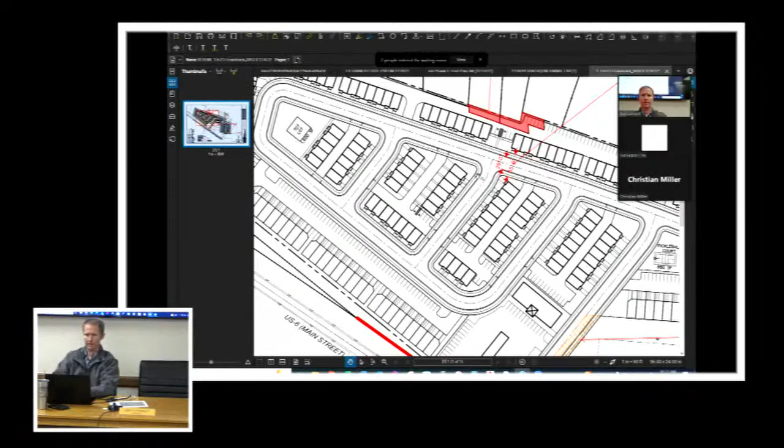The only thing I have is on the west end lot, those 5 homes right there - that's the only frontage access. A little bit in the center ones too. Those ones only have frontage off of that private drive.

Seems like we've dealt with this in other communities, and I don't know what the overall determination was, but I know for fire and EMS purposes, that style doesn't work well and makes it really restrictive for us getting in and out of those homes, as well as finding the addresses, because they tend to get lost. I think planning and zoning is going to have some comments on that as well, on that set of buildings.

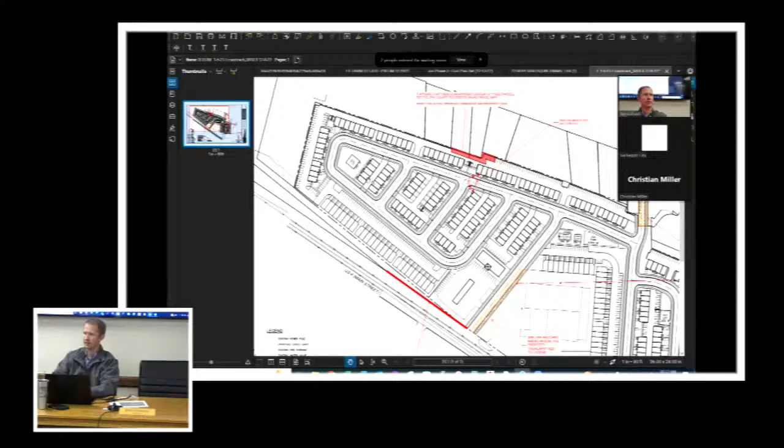We'll look at that as well. We can talk about that right now. Our suggestion is to keep with the consistency of having everything on a public street.

Maybe you could take the 2 outside units on each end and turn them so the fronts are facing the public road. I don't know what the total unit count is where another unit could be put. There might just need to be a unit that's lost there.

In the exhibit of the development agreement, you only had 4 units in that specific location. So having those units turn and face the public street, and then having like a little hammerhead for access to those garages, that might be something that needs to happen to stick with the requirement that everything be on a public street.

So I think that would probably satisfy the concern you had there. You might be able to turn 3 units to face the north and 2 to the south, something like that, with a small driveway in between them so that they're rear loaded.

Okay, yeah, we can look at that. It just depends on what space you have, and if that eats up any of the open space, because I know you're probably close to the open space agreed upon for this development. So I think most everything else in terms of layout probably works, but that was the one area we identified that probably needs to be adjusted a little bit.

Okay, John, you've got 2 people in the waiting room. Yeah, one there for Sean Young's for a separate project. So Jacob's with us? Jacob's with you guys. Yeah, gotcha. If you would, please. Yep.

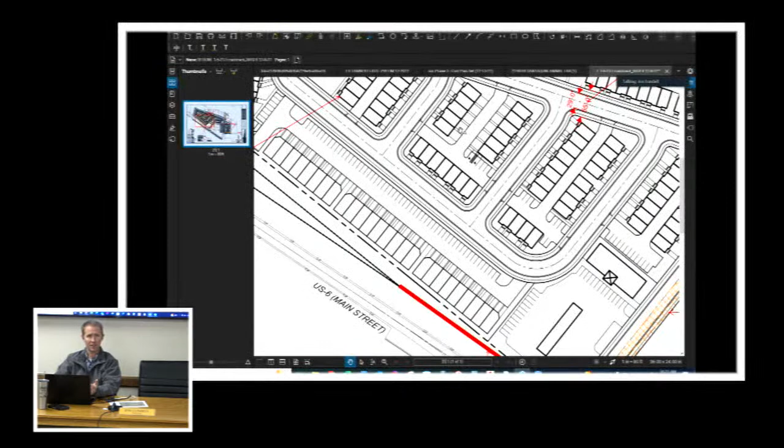Driveway parking is not allowed for this development, not counted. So it appears based on the concept that you're counting these parking stalls as parking - that would be considered tandem parking, and so that doesn't qualify. To be clear, you can park there, you just can't count it as part of your parking requirements. Like we put two smart cars in those garages. Probably four smart cars in the garages, but not two F-350s.

Right, those will not work. And maybe some feedback, since this is a concept plan - there's only 11 units out of those 100 plus units that even have a driveway. Sometimes those driveways cause more problems than they're worth, being an extra place for someone to temporarily park or whatever.

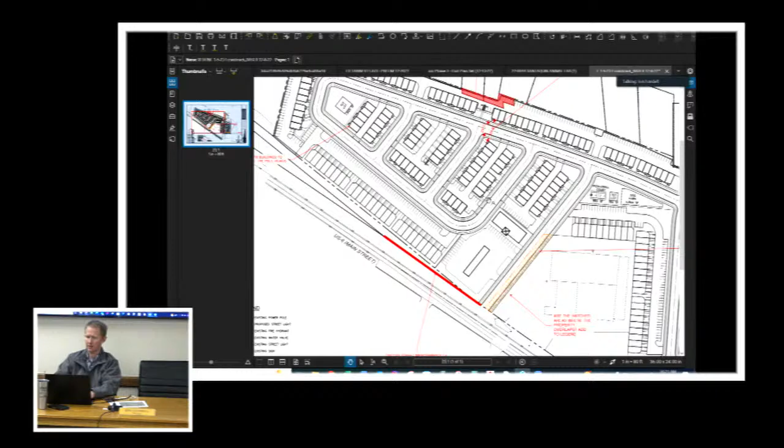They're not even counted towards parking, but the thought we had was maybe taking those units and bumping them into the interior of that little miniature block and not even having those driveways, so you're consistent around the entire development. We've had places where those driveways pop up and turn into permanent parking stalls, and then they use their garage as a storage unit. It's hard to plow through there because you have cars parked out there sticking into the access, causing issues with neighbors not being able to get good access to their garage.

So that's maybe just a suggestion. I know you put it in there because you had enough space, and it seemed great, but there's nowhere else where you have a driveway outside of the garage. I don't know if the DRC feels any differently on that. That was one that, as we talked with planning and zoning and engineering, we thought may as well make it consistent with everything else, since sometimes those driveways are more of a curse than a blessing.

We'll clean these notes up, I'm just putting that as a placeholder. So I do have a question for you, Taylor, on these access roads - the private driveways are 24 feet wide. I believe that's because they do front on a public street, with access there. That 24-foot width, my understanding, does meet fire code.

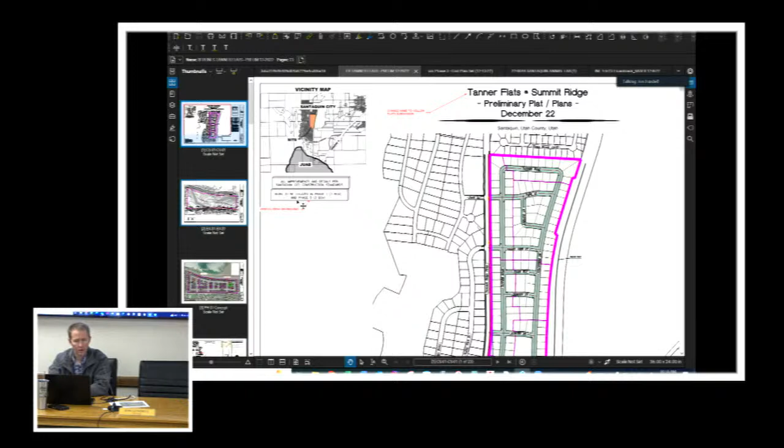Just a note to make sure that you'll coordinate with the post office so that they're aware, so we can get their mail boxes in the correct locations to appropriately meet their requirements as they deliver mail to the proposed development.

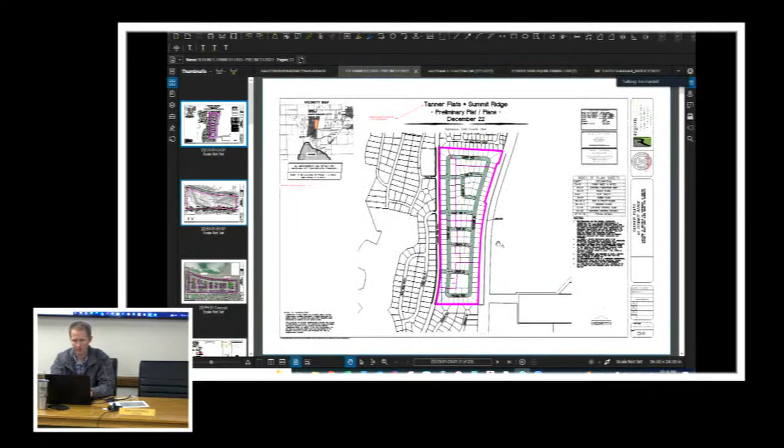One item we may need to look at is renumbering the phasing on this, because for phase 3, we require that we have 2 points of access for phases. Right now it appears that if phase 3 was built before phase 5, they'd have one intersection that everyone would be funneling to. So we may need to rename or rephase some of them so the outside phases are towards the end, and the 2 frontage ones and the 2 interior phases would be done, so that phase 3 and 4 wouldn't be in conflict with our phasing requirements.

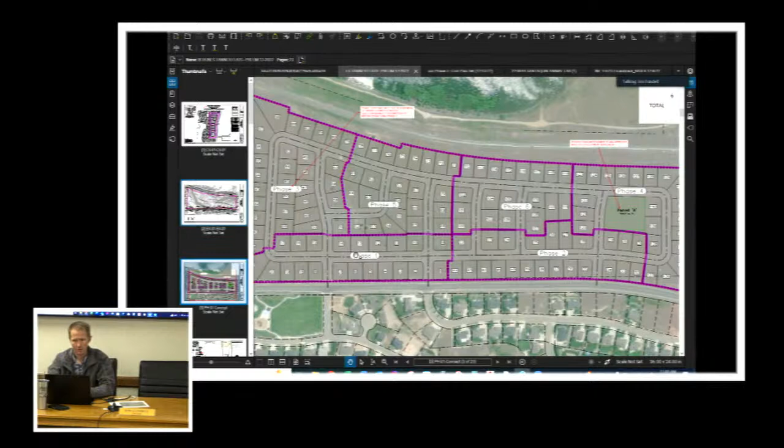5 would need 6 to go in, so I anticipate it'd be like 1, 2, 3, 4, then 5 or 6 on the north and south side of it.

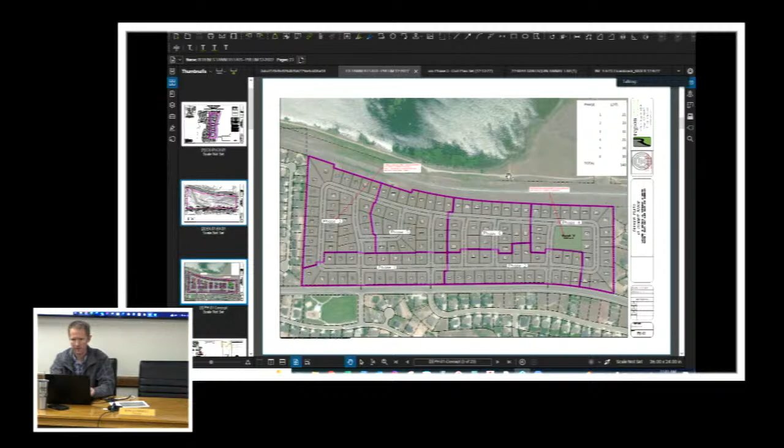Keep going through - there needs to be, as we go through, accesses for these lots that back onto Summit Ridge Parkway. A fence will help delineate that, but we'll also need a note on the plats that say no access onto Summit Ridge Parkway.

Also, that area highlighted in red here is currently owned by USP, which is a partnership with Ivory. And this acreage here is under strictly just Ivory. So when we go to recordation, there'll either need to be a line on the plat sheet for USP, or Ivory will need to get the full name of that parcel into their name. That just helps with the recording side of things, trying to get that all taken care of.

Just a cleanup note - match the hatching, either increase the size of this one. I mean it's still there, but it's reversed. Just those 2 don't match.

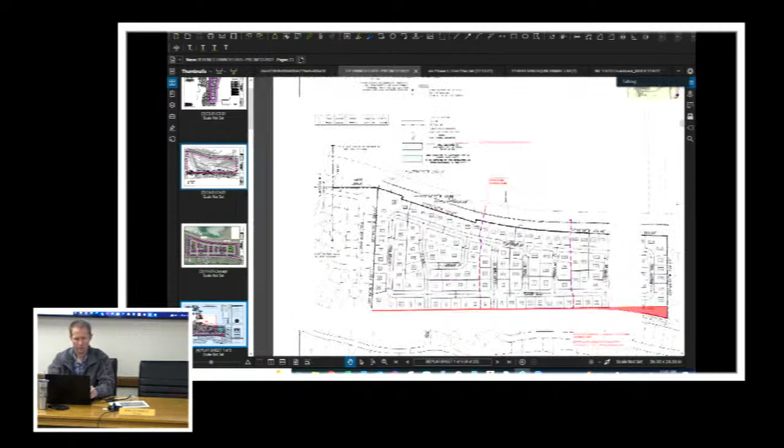Already talked about fencing.

Couple of items - the R10 zoning requires 80 feet of frontage. Right now all the corner lots are short of that width-wise, so it would be possible to do a knuckle on these to offset that and give lots that full 80 feet of frontage, which is different than the Summit Ridge development, which allows for a little bit smaller. But this is R10 zoning, so those frontages are required to be 80 foot.

Is that measured on the right of way or the setback? This one's on the right of way, it's 30 feet back. So at this area, 30 feet back of the side lot lines, it has to be 80 feet.

For R10, it's measured at the front setback if it was a cul-de-sac - but these are not. To make it work, they're going to have to do a cul-de-sac or a partial bulb out, knuckle, or something of that nature to accommodate that. And really the specifications of that bulb out and how deep it needs to be is as far as you need to go to get that setback at 30 feet.

So we've given you the code to go look at on that to figure out how to make that work, Sean. At this point it's just a curve, not a cul-de-sac, and that's why it's measured at the road. But if it becomes a bulb out, it's measured at the front setback, or if it's a cul-de-sac, it's measured at the front setback. So you'll have to bulb it out until you get the appropriate 30 feet at the front setback. An example just north - there's that knuckle there. There's other examples throughout the city, that's one that's right close to it.

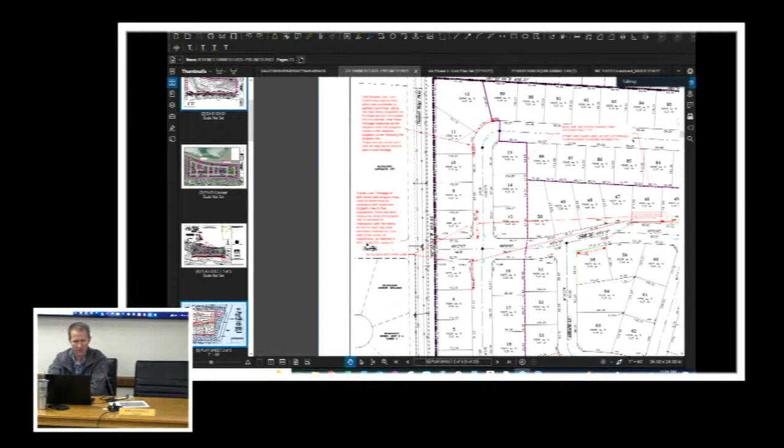Easy enough. Then a note on corner lots - again, making sure that we have 95 feet of frontage on both sides of those. That's kind of a continual note on a lot of the corner lots, so we're referencing the section of code we're referencing on those. Again, this is different than what you've done in the past because those have all fallen under the PC zone and the development agreement. This is strictly the R10 zone, which has different requirements.

One note here on this purple line - it's basically asking what that's referencing. It doesn't appear to match the phasing, so if they are the phasing lines, they'll need to be adjusted appropriately.

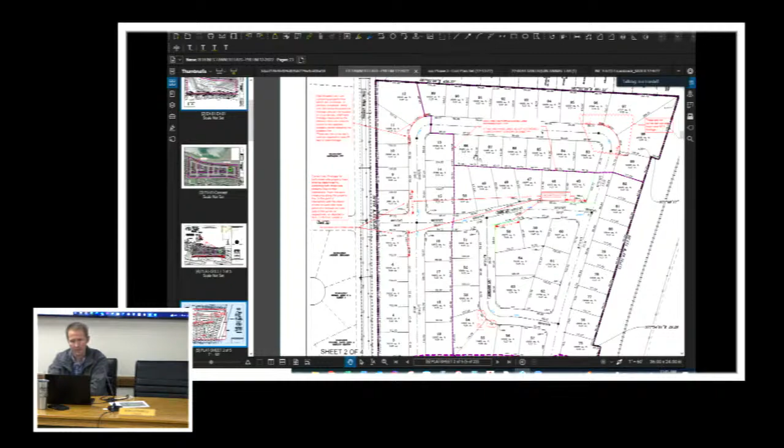Again, we've already looked at that one. John, did you talk about the restriction of access on those lots right at the entrance?

Yeah, we talked about that earlier. Again, kind of the same notes there - we've got that comment shown in Valley View Drive. A lot of those are repeat comments, we're just kind of showing them.

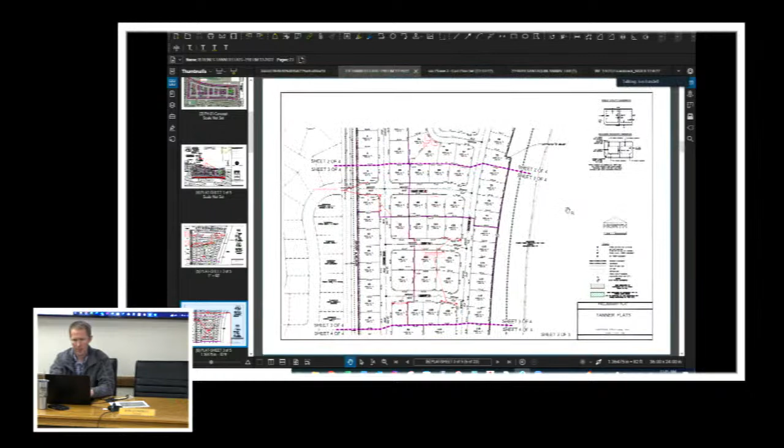Again, setbacks follow the R10 zoning, so that building setback detail needs to be updated.

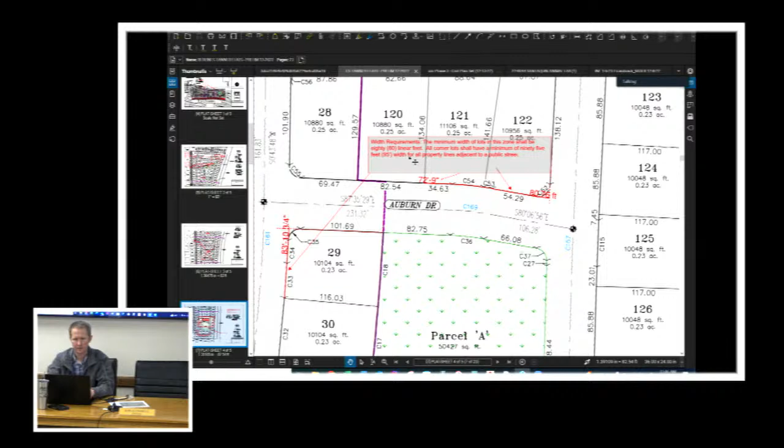And then, again, same kind of follow-up note on that one. Again, include comments on the park.

Regarding the sewer as it runs out to the northeast, approval from the railroad and appropriate property owners is needed. Our understanding is that there may be a piece of property back here that is not owned by the railroad, so that will need to be clarified, and any easements need to be coordinated between the railroad and property owners along there.

There's a document I've seen - I believe from where we own property to the north and where this annexation property starts, there's about a 20-foot right of way there that somebody owns that's not the railroad. I believe the previous developer, or the overall master developer of Summit Ridge, owns that. Yeah, I know it starts right there where that existing manhole ties in and goes north.

I haven't seen anything south of that. It'll have to either be with that, or actually, I think it's farther south, because according to the county, where that manhole is, it's actually Santaquin City. I believe there's another leg of that coming down that's privately owned, not railroad, that would benefit the property there. We'll double check that and grant whatever we need to.

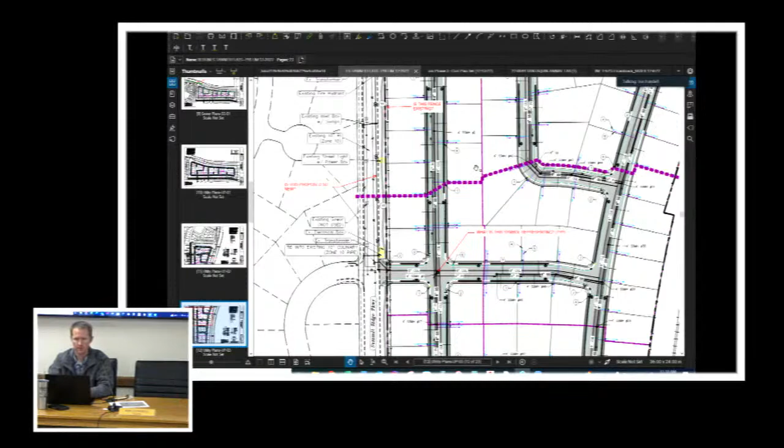Just a note here, you are showing a storm drain line within Summit Ridge Parkway. Is that a new line, or is that existing? We actually don't have any storm drain within Summit Ridge Parkway except the curb inlets to the sumps, and there's no interconnecting pipe running along the length of the roadway. Yeah, we'll remove that line.

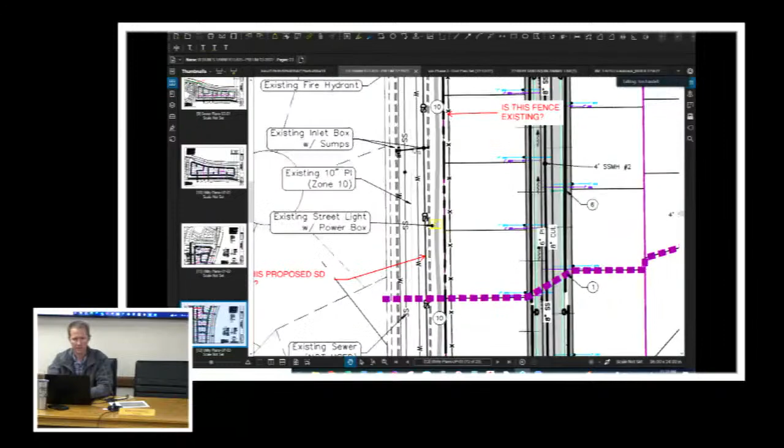So just for clarification, that would need to go out. Again, some of these storm drain lines, the line weight makes them look like they're showing as new when they're existing, so just some updates to clean up the lines there.

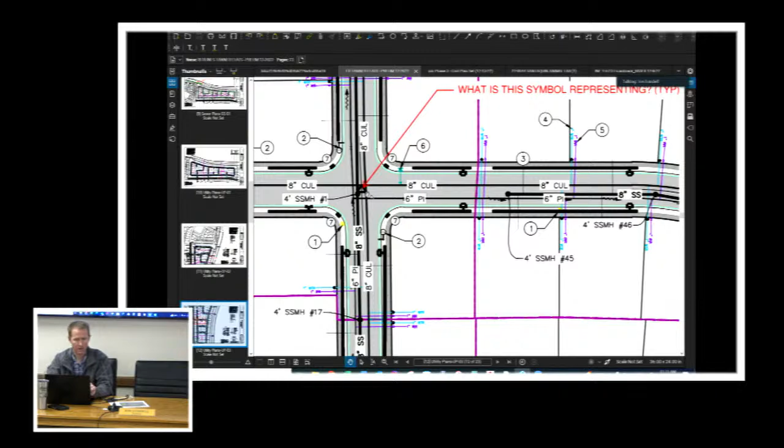Again, there's the symbol in the middle, whether that be the center of the intersection, the midpoint, or a valve tree. It's just not showing what that symbol is representing.

And then we've kind of already talked about the fence. That existing fence looks like it's proposed to be new, but it looks like it's existing. I'll talk with Skylar and see what he wants to propose, if anything, there. Okay.

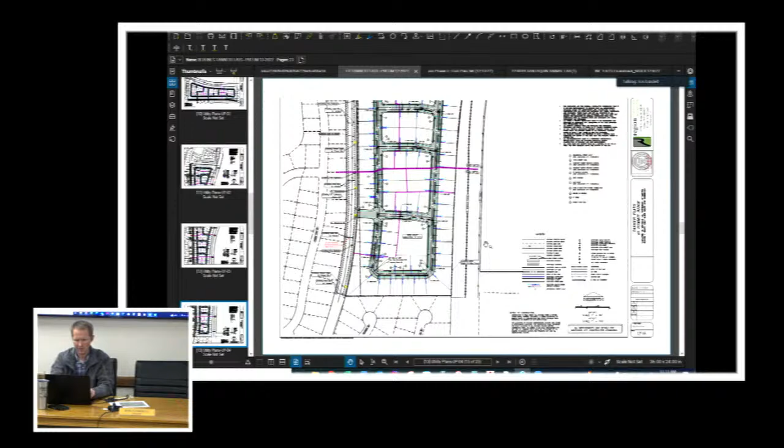Again, we've already talked about that note, same one. We do need - we have the ESA, the phase 1 ESA that was done with the project. However, we do need a geotechnical report for the site.

Again, similar things as before: cross-section, footing, storm drain perc rates, etc. need to be included. And that kind of leads to - you said storm drain report, you meant geotech report? Geotech report, but we also need a storm drain report, yes. We've got calculations, but we don't have the full report showing the contributory areas and the storage being provided by those within those contributory areas.

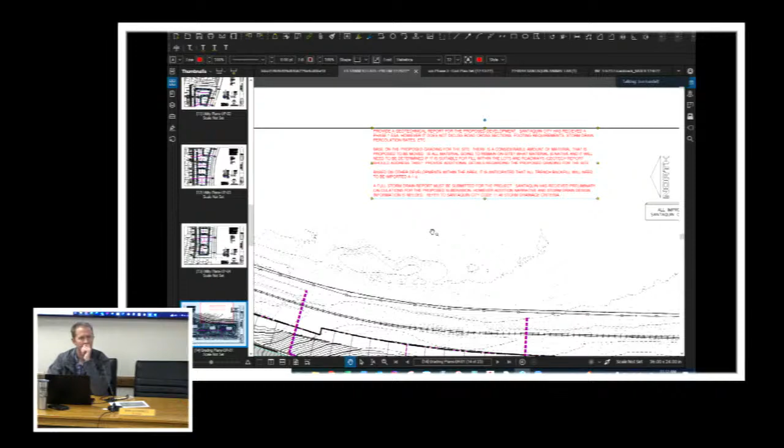Yep, and that's this note right here, referencing section 1148 that you'll want to look at. Yeah, we've looked at a few options and wanted to have that discussion about the storm drain, where we've packed it full of R-Tanks. The only other option really would be to remove three lots down there - we've talked with Ivory about this - and build a pond, a big pond, kind of down right here where that little spot is.

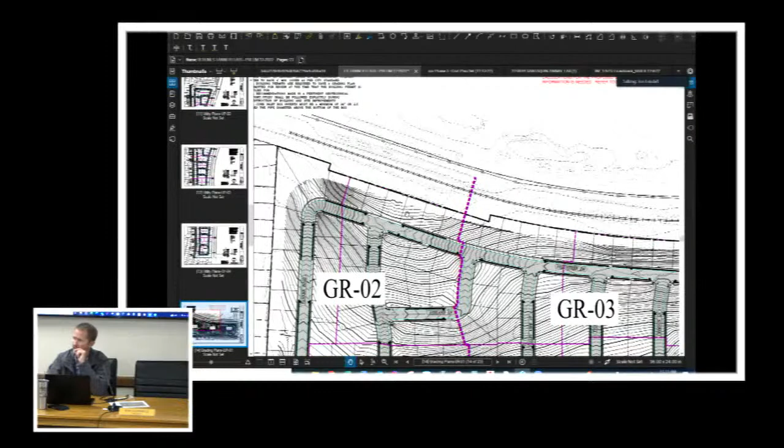Sean, the way it appears you've designed it with the R tanks, there's no trunk lines - it's very localized, very just this area, and that's why we need those contributory areas. Again, if you go to a pond, that's going to change things and increase lots of manholes and pipe and that kind of stuff. It would be a lot, exactly.

Yeah, so I don't know if the city really has a preference there, or is it just whatever we finalize and decide? Either way, it just has to protect the infrastructure and provide the storage that's required. Okay, that could be an option anyway, that Ivory was playing with - losing some lots.

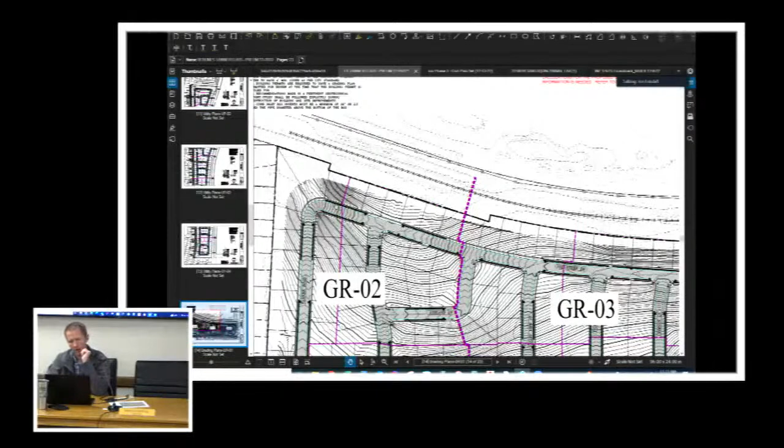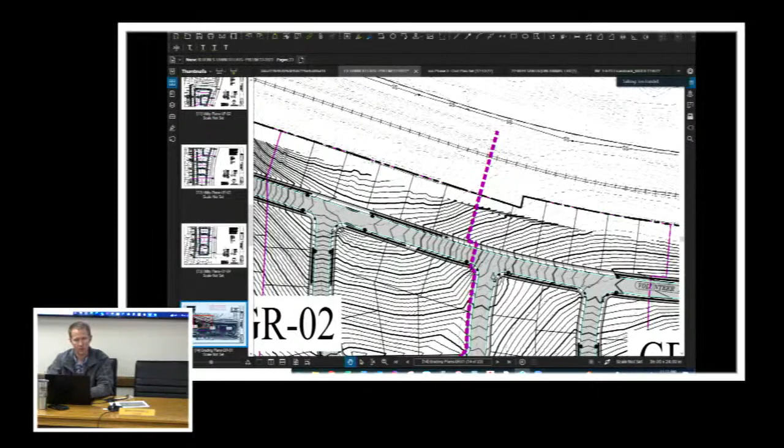On any of the underground retention, whether it be R-Tanks or StormTech or something, we do require that a clean out or inspection port is included on the opposite end from the curb inlet, to allow us to do any type of maintenance as we roll through. This helps minimize the effort for Jason's crews, public works crews, maintaining those going forward.

Again, we don't require trunk lines, we don't require that you lose lots, but it's how can you make the system work on the site that you have.

And then again, it kind of goes back to the geotech report. Just based on other developments that have occurred in the area, we anticipate that all the native material won't be able to be used, so plan on importing 100% A1A material for trenches and roadway cross sections. Yes.

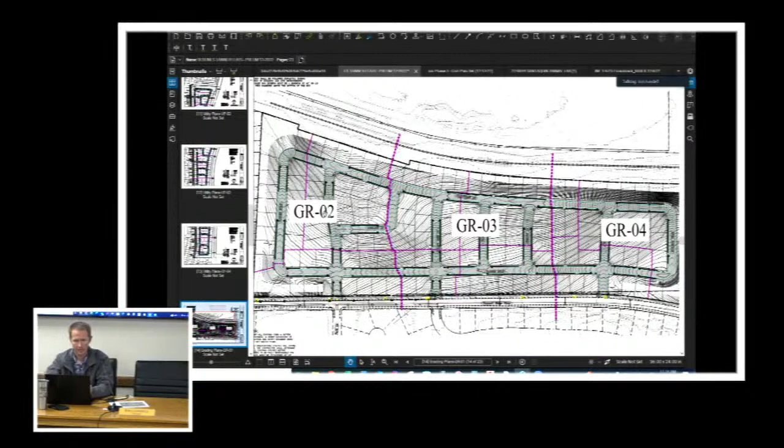And on that, there appears to be a lot of grading that's going to be done on the site, because all the dark lines through here are indicating a change, either cut or fill.

So part of that is we need additional information to see if a mass grading permit would be needed for the site, because there's a lot of material that's got to be moved around there. Not saying that it is required, but we need additional information, such as your cut fill amounts, to show where material is going to be moved to, how the lots and future homes are going to be protected. Because if they're built on that fill material, what means are in place to protect those homes going forward? What's your strategy there?

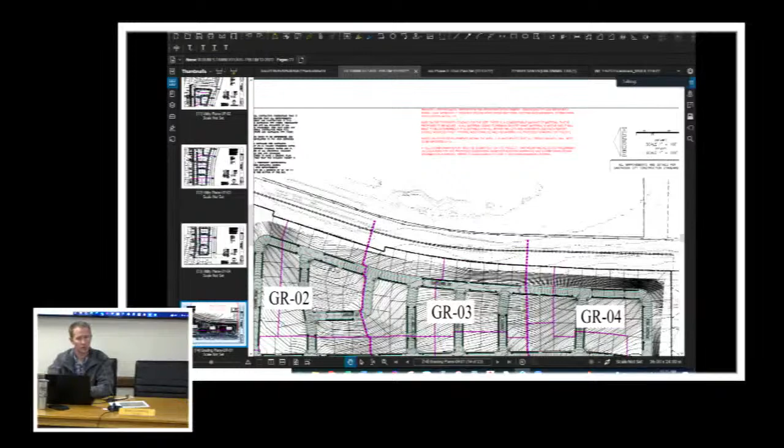Are you balancing on site, or are you having to export, or what's happening? It's fairly balanced.

The initial plan was to come in and do mass grading of the entire site. It sounds like the new plan is just to focus on phase 1 for now. I can provide you with whatever information you need as far as cut and fills and all that.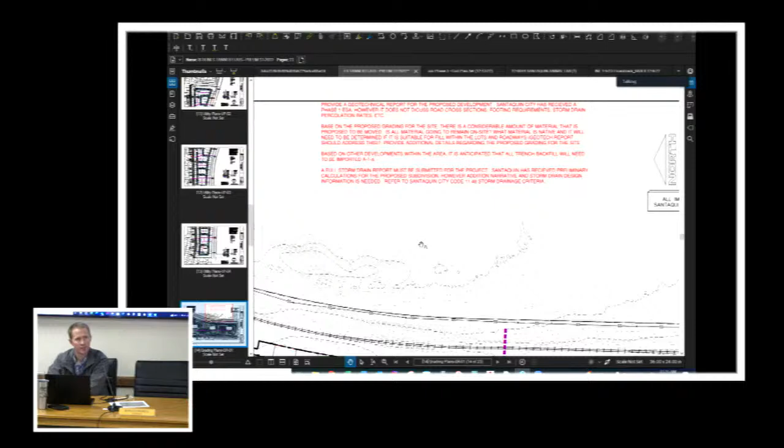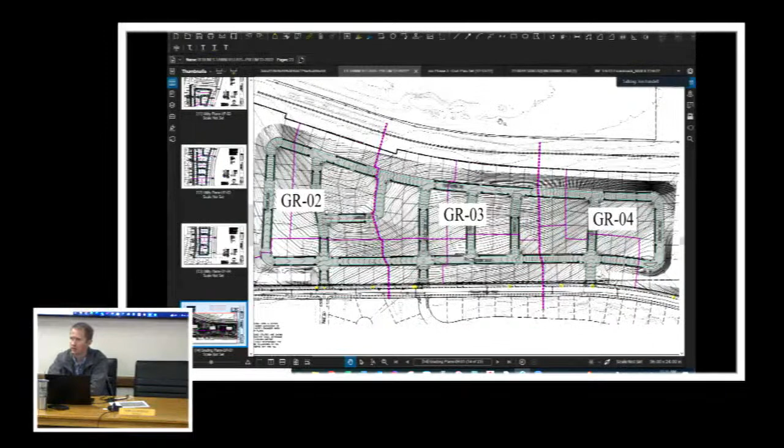I'm going to also caution you on the strategy of just doing a phase at a time, because especially where you're going to be using potentially that road access that's being built for residential use, that road access is not going to necessarily be built for trucking use. So you really need to look at it and make sure, if you're going to do it that way, it's probably going to be a mass grading permit rather than just doing mass grading under our subdivision code.

So you really need to look at the strategy and make sure your future residents aren't being impacted. In fact, on another area, we've done something similar where we said you can't use the residential roads to haul stuff out, just because they're not built for it. It also has a huge impact on your future residents, your future purchasers.

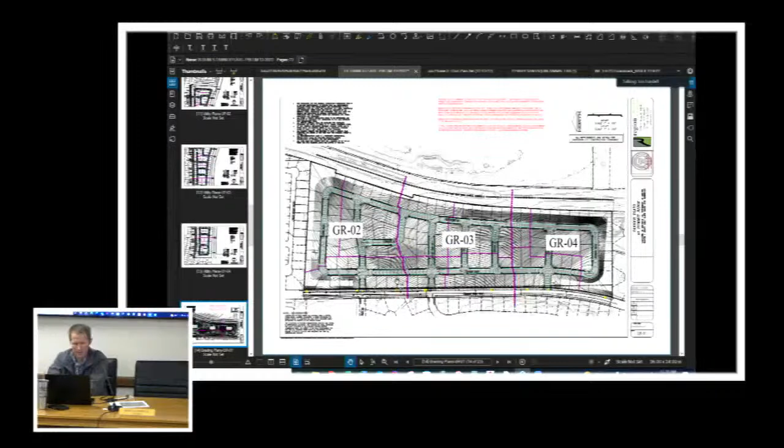I don't believe our first phase has a ton of earth moving, but if we have to—if the back phases do—then you really need to make sure you're considering how you're doing that and minimizing the impact on those that are going to potentially be there moving forward. Yes, understood.

So just trucking in all that A1A material, trenching and everything, would be quite an amount. Right, correct. Again, you've got 3 accesses to the parkway, so you could certainly do one and be fine, and probably even do 2 and be fine. But the problem is where it looks like you've got some pretty heavy grading at the back of it, and the last thing we want is all of that grading material having to be brought out when there's 3 sets of phases already done and complete up against the parkway.

So you just really need to look at that strategy and make sure we're doing what's best for the residents. Again, if there are going to be impacts, you're going to end up with a mass grading permit, which is a whole separate process we have to go through. Sean's familiar with that, but there's 2 ways you can do it within the city: one is with a mass grading permit, the other is through our subdivision. But the subdivision side doesn't allow you to do some of the things done under a mass grading permit, so we really need to know what your strategy is on that.

Is that what you're saying here—that GR 1, 2, 3, and 4 are separate grading phases? No, that's just a sheet key, like an index sheet.

The initial plan, before the market changes, was to go in and mass grade everything.

Kind of how it was designed. So we thought again, but we need to look at it. We need to have more details and make sure we understand, does it fall under our subdivision code or does it fall under a mass grading permit? That's really what we're going to have to look at. It's going to have to do with impacts and any off-haul you're going to have to look at, probably the two major points of that.

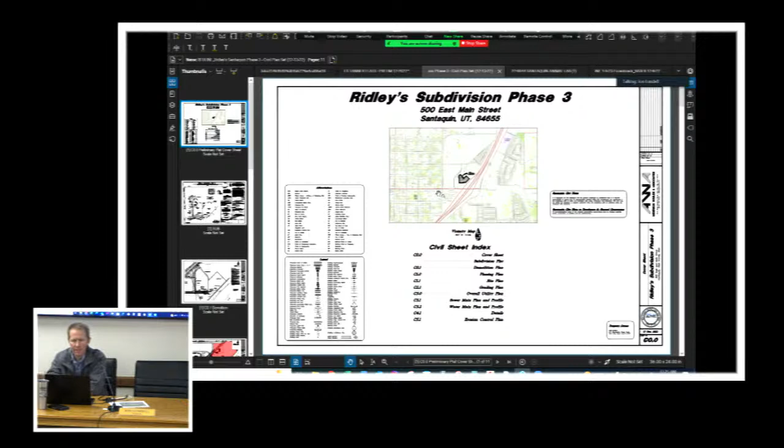Okay Sean, so now we've got you - this is a proposed 2-lot subdivision, the next phase for the Ridley's development. Let me pull up the overall site plan. It's proposed for 2 additional lots, directly east of the 3 lots currently under construction. There are a couple additional lots that will be included in this proposed subdivision. Again, this is the concept, so there's no action taken today, just providing feedback on the development.

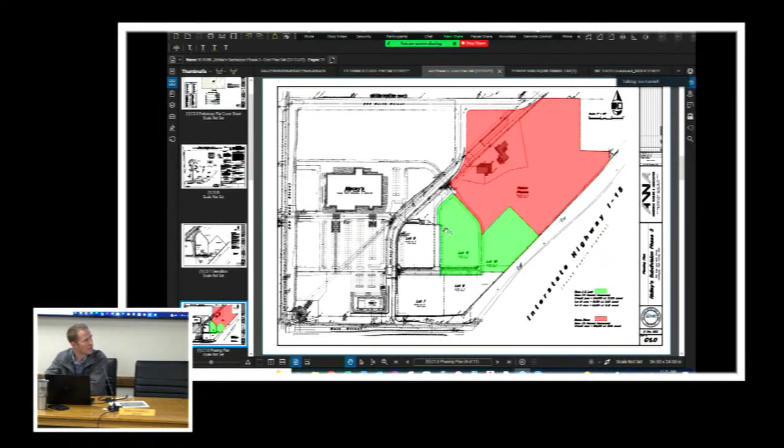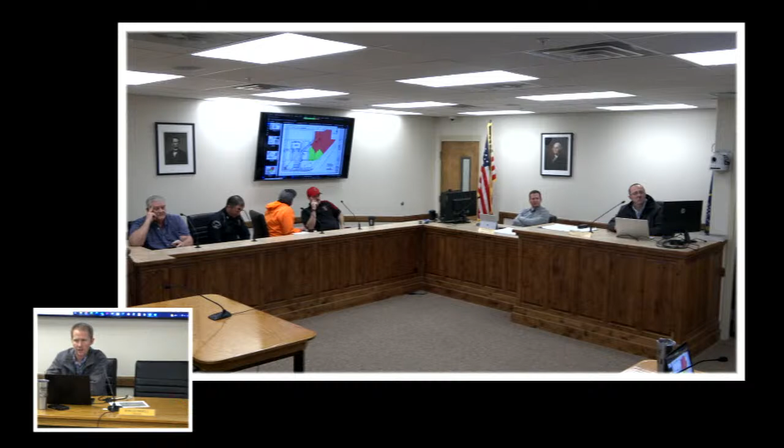So with that, we'll go around the room. Randy? I think we looked at addressing on that, didn't we Camille? They're addressing off of 500 East, which is really the only one. We don't have a public main road, a street, there do we? So I guess for police and fire, we need direction for addressing, because all these lots are kind of tucked back in here. Try to remember what we did for lot 9 - it's addressed off of 500 East. So what would be needed, because all this back here will be private roads, accesses, etc.?

From my perspective, where it's going to be commercial, I don't have an issue with it, because typically when we get dispatched to commercial, they give us the business name. Okay, sounds good. That's it.

Anything else, Randy? Okay, Chief, first. I don't have anything at this time.

Okay, Jason. Notice on the water line, do we want to stub in fire risers for any potential buildings into the properties? No, we just don't know what they are. We'll put it in the wrong place probably. Yeah, always. I just noticed there was a water meter, 2-inch water meter stubbed in on, I think, what is that lot right there?

Yeah, this one right here. So lot 11, the water main's not under pavement currently. So our intention was they can connect fire and hydrants and water meters as lot 11 develops, just because on the west side of that property line is an 8-inch water main.

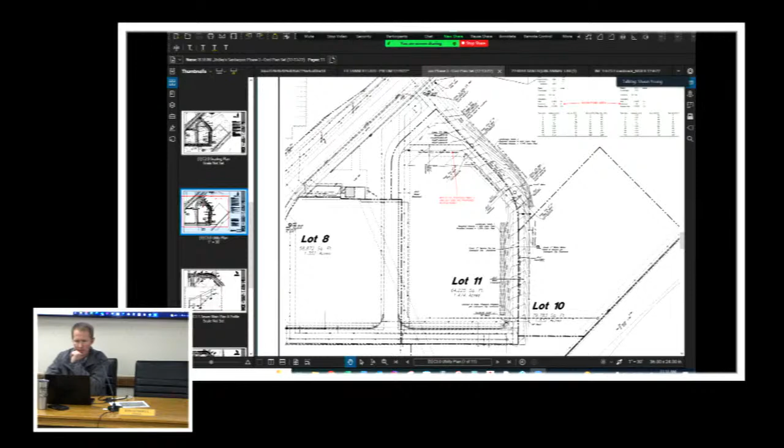So it's on this north end here. Right, I think what we were doing is we needed cover over the pipe. The grade goes down so steeply that one of our challenges was getting the grade and providing enough separation between water and sewer. We didn't want to tear up the existing asphalt that we're just putting in right now, so we were connecting just shy of where that new paved access way will be, so we're not tearing into the asphalt and continuing it along. But on the concept plan, there's no way we're going to be able to just put a building in that little area, so it's probably going to just be landscaping. Okay.

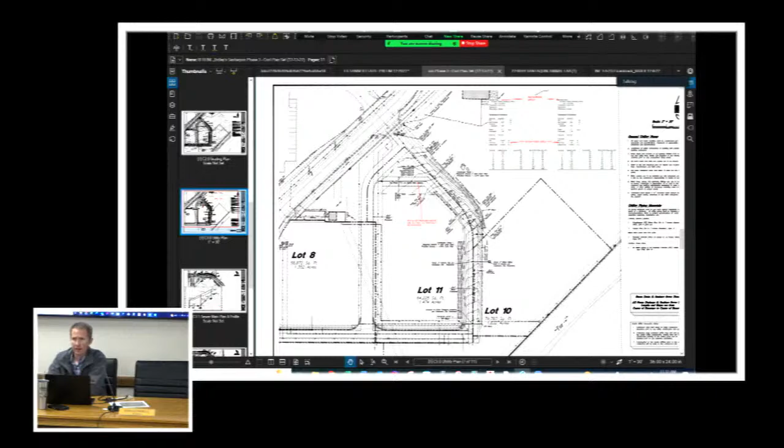Jason, anything else? Nothing else. Okay, Taylor, fire? I don't have anything. Okay, Jason? Yeah, just a couple things.

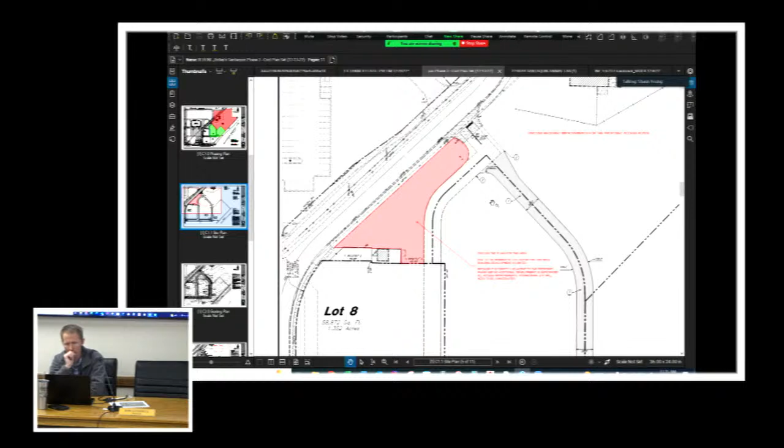Would you allow, at some point in time, having parking along that edge, and then essentially having a big park strip behind it? Yeah, you could include that as part of lot 11 and be part of your parking, as long as we can maintain the access for the water line and access for those other 3 lots that were previously created. It could be something different than what you have shown. We just need to see some use for that rather than it just being some remnant parcel that's unusable. Yeah, that makes sense.

I think what you just said, Norm, probably makes a lot of sense if we just make that part of lot 11. Sure, you could have that be part of lot 11 and have it be parking or landscaping to meet code, picnic area, whatever. Yeah, I think that's how we'll proceed. That makes a lot of sense.

Okay, that's probably the main thing that I have, but again, we'll look at red lines and we can chime in as needed. Yep, okay, excellent.

Okay, we'll keep rolling through. Unless you have anything else, Norm, that you wanted to add? Nope. Okay, one thing we wanted to discuss was, granted we recognize these are private accesses, but some things that need to be taken into consideration are storm drainage and when those improvements are going to be going in, such as curb and gutter, the roadway storm drainage requirements and such.

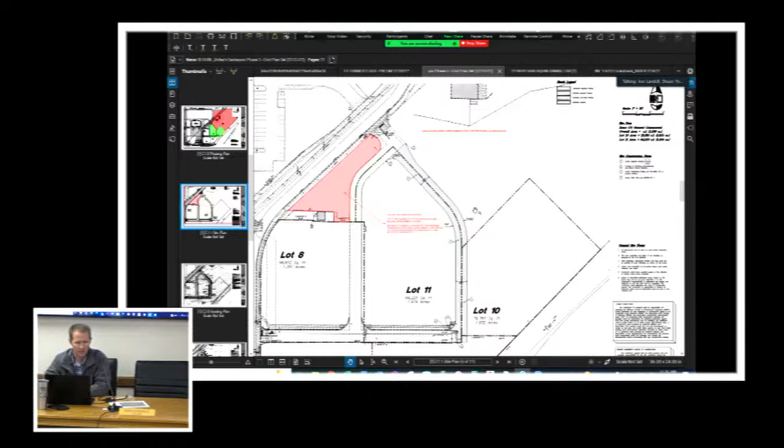I know you're talking a lot about along 500 East, right, John? The diagonal 500 East. Well, say if lot 11 brings in this, the sidewalk would be right, the frontage would have to be finished on that, right? Correct. Yep. But say you do have some storm drainage swales coming in through here. I'm anticipating that the lot improvements along here would be curb and gutter. Either way, that frontage needs to be improved because they can't just leave that as a remnant parcel. It's got to be included somehow.

And based on where it's at, Sean, it can't remain as part of that larger parcel that we've been shaving lots off of. I think it needs to be addressed now and not something kicked down the road. Yeah, we'll incorporate that into lot 11, and then we'll improve along the frontage there with the sidewalk. That works, that'll be great.

Similar to lot 8 with the car wash, we'll put in the curb, gutter, and storm drain improvements as each lot develops, and each lot will self-contain their own stormwater. Lot 8 did put in curb and gutter along there, along with the site. That'll be very similar to how lot 10 and 11 develop.

Lot 11, we have no idea, that's just what's left from what the proposed user of 10 wanted and what we were left with after lot 8. But when those do develop, we'll make sure to include curb, gutter, and sidewalk if necessary, and self-contain the storm drain for stormwater.

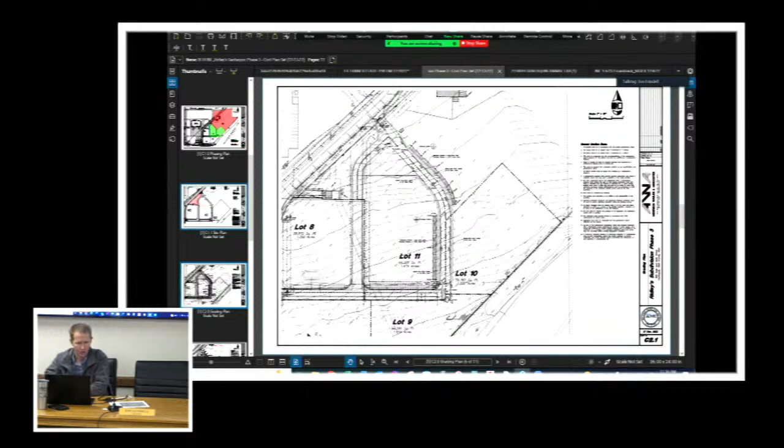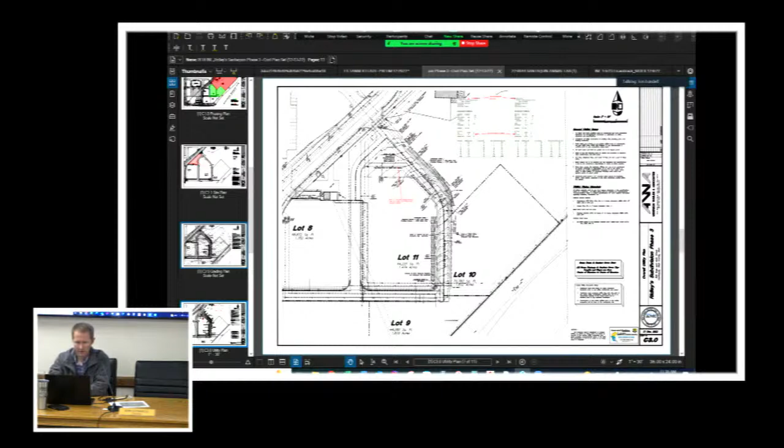Okay, and then just between here and there, making sure that the swales you have are appropriate so that we don't start to impact the home up here further to the north and the development further north. I've already discussed those. The storm drain report and calculations, just to clarify, as we start to roll forward on this, as we get preliminary and final applications coming in.

I believe that was all that we have on here. Is there any other thoughts, comments, or questions? Not from my end, I think this one's pretty straightforward also. Yep, okay, if there's nothing else, again this is a concept, so no actions needed. We'll work on getting these over to you probably the next day or so after whatever comments are included from Planning Commission tonight. Okay, excellent. Okay, thank you, Sean, appreciate it. Thank you.

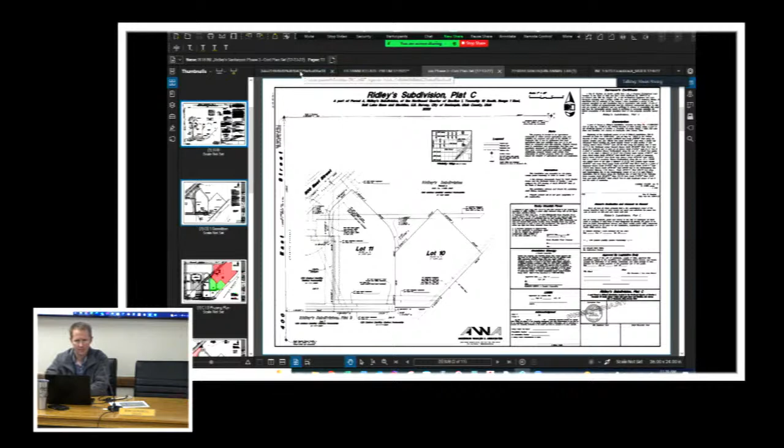Okay, next item on the agenda is the site plan for the Nebo School District Animal Labs. So you can stop sharing, John.

Thank you, you're probably right. Let's see, we don't have anyone else online, do we need to keep it running? Yeah, that's what we're... okay, we can end it. I think that's your host, we might have to. I will go ahead and end that then. And no one else was on, so we're not kicking anyone off.

Okay, so proposed, if you wouldn't mind Mike, state your name for the record please. Mike Anderson with Nebo School District. Thank you. Well, this is a site plan for, my understanding is a temporary relocation of the animal lab from the high school. Was there, and to construct some animal housing structures down here off of 400 East and up here adjacent to the Highline Canal.

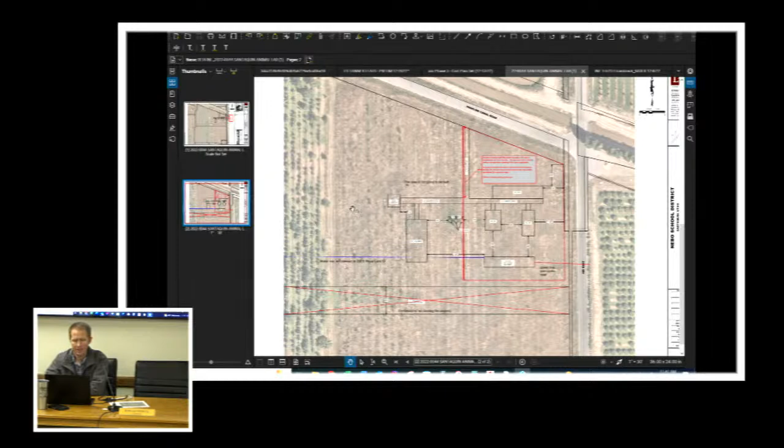It's a site plan application that's reviewed and approved by the DRC. I don't know if you guys are familiar with the animal lab and what they do - they house livestock at the site for educational purposes. So it is an approved use for the site, and we're making sure they meet code and have appropriate services to serve the site.

So if not, we'll go around. Brandy, have anything? I think I've assigned an address, 975 north on 400. Okay, before we were just using intersection addressing.

And there's how many buildings? 1, 2, 3, 4, 5, or - we got 1, 2, 3, 4, 5, 6, and silos. Yeah, that's actually not updated. I don't know where the updated one went that I sent.

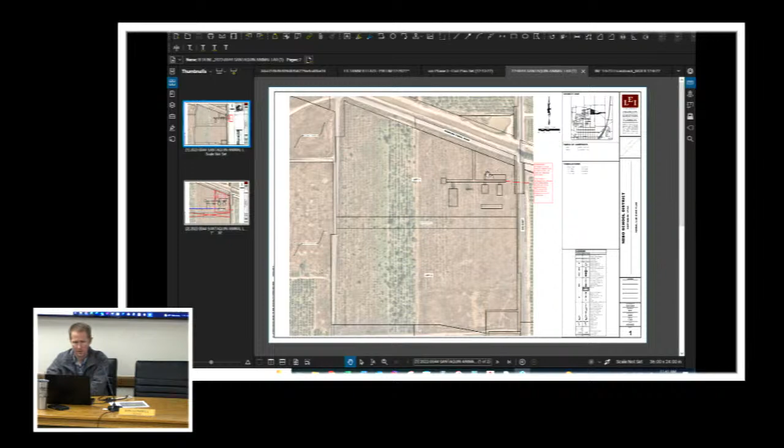There's actually three buildings on that south end. The driveway - everything west of that driveway coming in is not going to be. So essentially these units here - I sent an updated drawing to Norm and Jason, I believe.

And then the three silos will go in between those other buildings. Silos would go there, and then there's one more building to the.

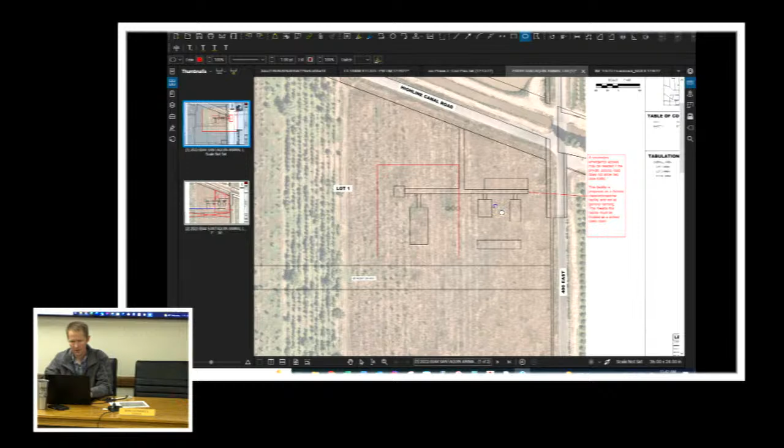John, let me send this to you really quick. I apologize, I didn't notice that you weren't included on that. I'll forward it to you and you can open it up so we can have that discussion.

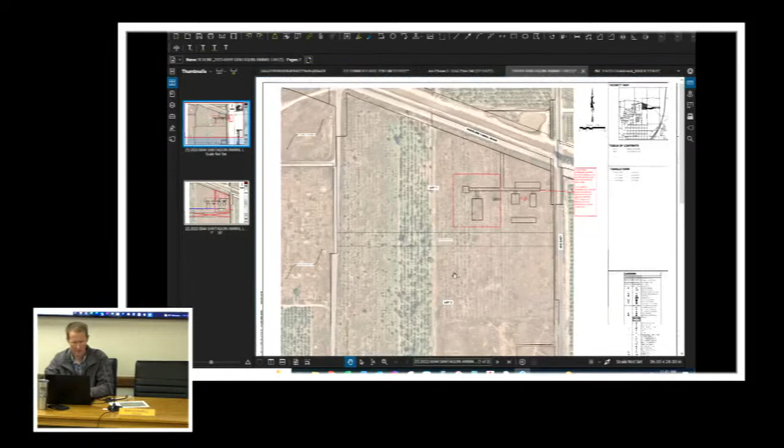These buildings are already being built, right? You could probably just point them out to us. Yeah, that's another thing - I've still never seen anything for a permit for buildings at all. We're going to talk about that here in a bit.

So that's the access coming off that northern road, the canal road, and the 3 units and the 3 silos. Yeah, so 1, 2, 3, 4 - so 4 buildings and 3 silos. Correct.

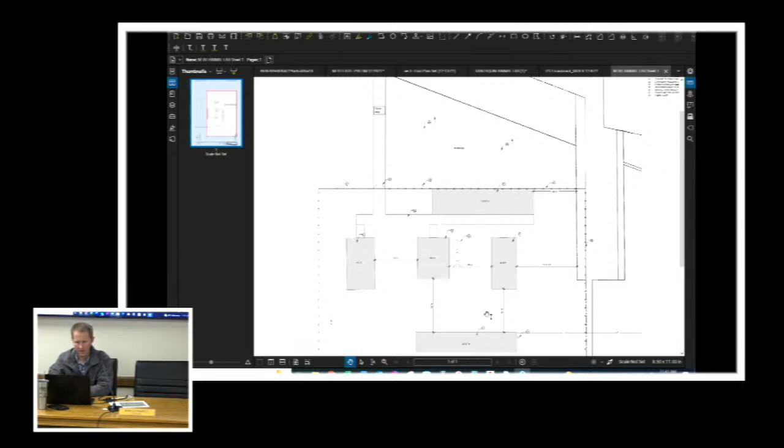So I don't have anything else. Anything else? No. You first? Is that a fence that goes around it? Yes. Just in case some animals escape, they're still trapped in there.

So is the main access off of what is that official road? Yes, it's a county road, we call it the county road that goes by the canal. That's the official access, and we've talked to the school district about that - we certainly wouldn't want to have that accessing that close to that intersection on 400 East. So that's what they're using now - yes, for construction.

All right, I don't really have anything. We tried to get that far enough away from the intersection and on the minor road rather than on that major road. That was the only question I really had.

Jason? I'd seen the water line coming in off of, I think, Highline. Is that what was planned to do? Well, that's a question we need to talk about.

Bathrooms - are there going to be bathrooms for individual use? There's not going to be any bathrooms there. This is just for housing animals and for teaching stations, the animal lab, to replace the one that was at Payson High School. Yeah, it's a great program - my daughter went through that, it's an awesome program. So that does bring up a question - if you're not going to have sewer there, are you going to have porta potties? You're going to have something there to be able to have sanitary needs? Yeah, there will be a hand washing station in one of the buildings, but not restroom facilities.

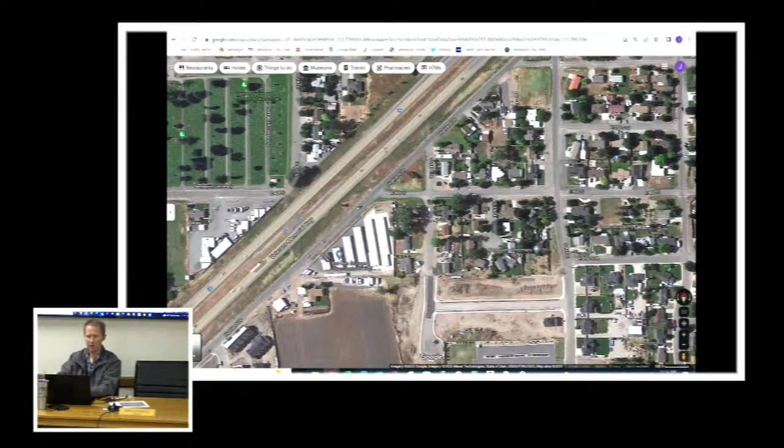I'll work on pulling up those traffic numbers, but is there any thoughts or comments on the proposed request? I'll kind of lean on what police are proposing. Stop going north-south? Mm-hmm, on 4th East or 3rd East.

So John, if we do approve the stop sign going north, we'd also put one on the other side of the intersection, right? Yes, so there'd be a southbound stop and a northbound stop. Or we could look at the potential for one going east and west, but the request is to put one north and south.

So typically from an engineering aspect, we typically would put those stop signs on the minor roads, or the minor side of the intersection, as it were. In this case, did the trailer give us some indication of which one? Did we do one way or two way, or how did we do the trailer?

We just did the northbound. Obviously, nobody's living in this new development, so the traffic counts were really low. But I don't think that's very accurate at this point. It doesn't give us a true representation of where we're headed.

Me and Jason were talking about this earlier, and I swear 20 years ago there was a stop sign there, northbound. Maybe not, there could have been. It's not on the cul-de-sac.

Maybe I'm wrong, but if I was looking at this development, say the entire city block as all new development, I would recommend a stop sign be put there, north-south. We'd put one on the east side of this new street, and so my opinion would be it needs one. I agree. If this was looking at it as a whole new development, it would be on our plans as a stop sign. So I don't have any problem putting one there.